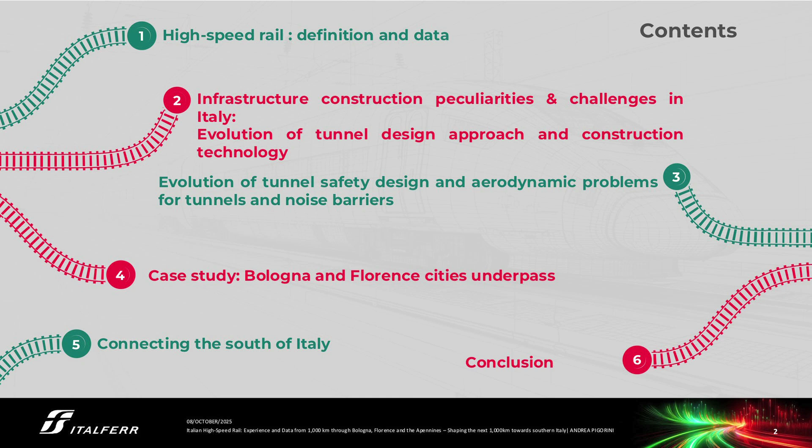But anyway, let's start. This is the contents of today's presentation. I will give you some definitions and data of high-speed rail, and then I will take you through the evolution of tunnel design approach and construction technology, taking into account the peculiarities and challenges of my country, Italy. Then we will go through the evolution of tunnel safety design, with some specific operational safety design, giving some clues about the aerodynamic problems we have seen for tunnels, and for noise barriers. Then we'll go through some case studies, Bologna and Florence city underpass, connecting the south of Italy, what we are actually doing these days, and some conclusions.

I pick up this definition from UIC, Union Internationale des Chemins de fer. Basically, high-speed rail is a whole integrated system, but the two legs of this system are the infrastructure for new lines designed for speeds of more than 250 kilometers per hour, and the rolling stock, especially designed for train sets, telecommunication, signalling, and operating conditions.

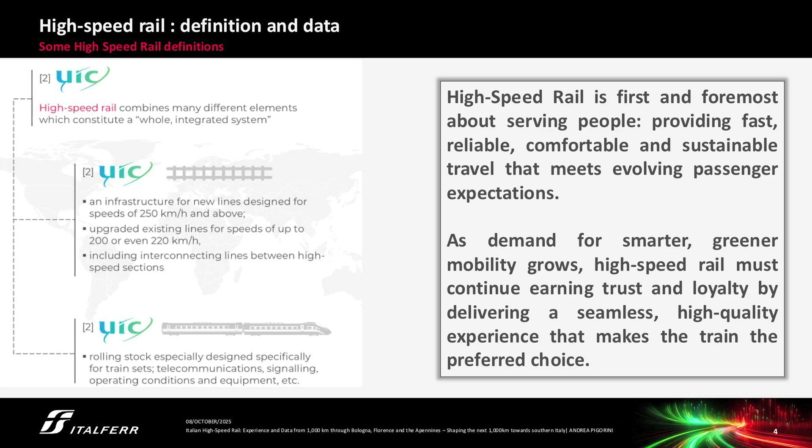But I like better this definition: high-speed rail is first and foremost about serving people, providing fast, reliable, comfortable, and sustainable travel that meets evolving passenger expectations, making the train the preferred choice. I think this is something I'm proud of as a railway engineer, working at Italferr, the engineering company of the Italian State Railway.

Some global data: we have more than 60,000 kilometers around the world of high-speed railway line. Of course, China is taking the most, more than 45,000. And there are about 13,000 kilometers of high-speed railway lines in Europe. There are also quite a good number of new tracks under construction, spread around the world.

And here come the stretches during the time. The first one is the very well-known Shinkansen in Japan, that was 1964. Then Italy came with the first stretch of the Firenze-Roma in 1981. And then other countries around the world followed, also UK, in 2003, with the stretch towards France and the Channel Tunnel.

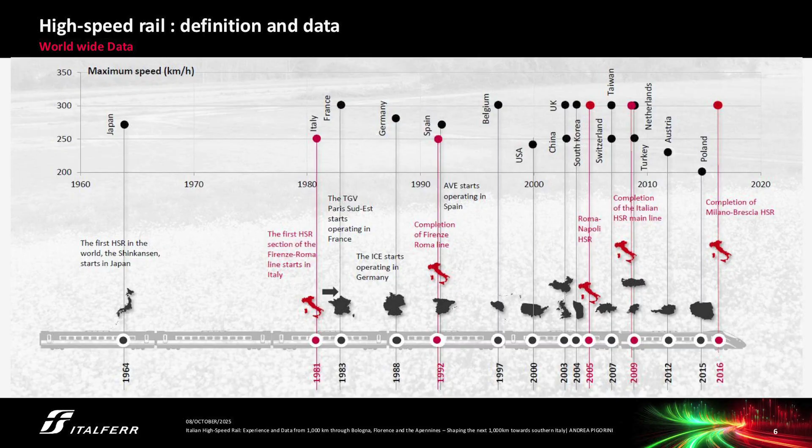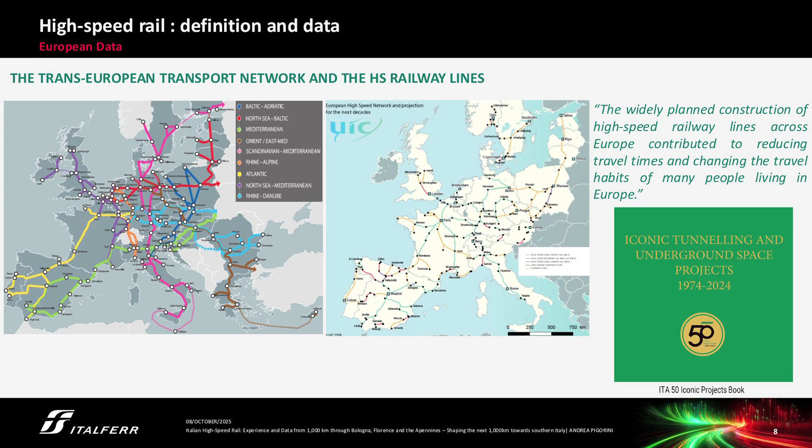Of course, the high-speed railway have been built along the Trans-European Transport Network. Regarding Italy, the two main corridors that cross Italy are the north-south Scandinavian-Mediterranean corridor from Helsinki to La Valletta, and the east-west Mediterranean corridor, the green one, that crosses Italy's northern part across the Po Valley.

And we have recognized the European high-speed network also in the ITA 50 Iconic Project book that was issued last year for the 50th anniversary of the International Tunneling Association, because it's true that railway lines across Europe contribute to reducing travel times and changing the travel habits of many people living in Europe.

Basically by shortening the distance between cities. And here is the stretch in operation in Italy, basically from Turin to Milan, and then going south, Bologna, Florence, Rome, Naples, and Salerno. At the end of 2009, there was a full operating network.

And as I mentioned before, this gives a large reduction in train travel time. As you can see, just on the last line, between Milan and Rome, we went from 4 hours and a half to less than 3 hours.

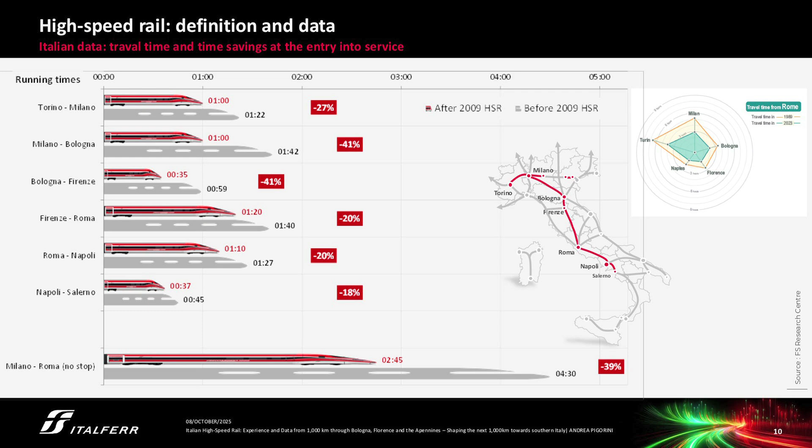Also, again on the Milano-Roma stretch, this changed the habits of the means people were using to go from Rome to Milan. We went from 36% of passengers using train to basically 80%. So just 10% of people are taking plane, and the other 10% private cars.

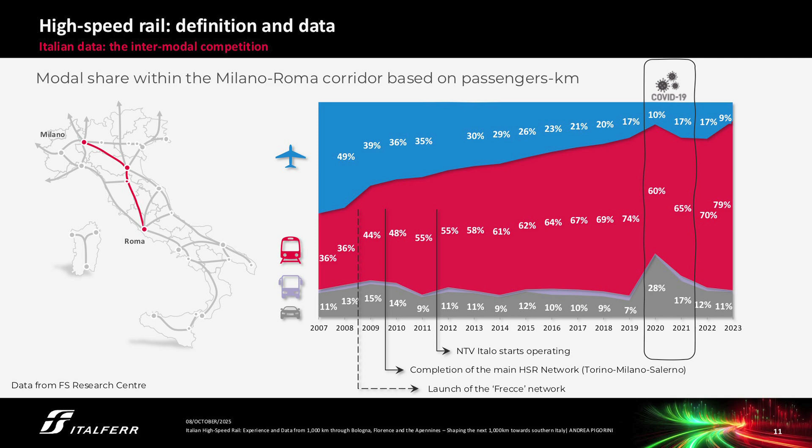I want to give you also some clues about cost. I won't be silent about that. So basically, the total rail infrastructure investment was about 29 billion euros, with design, investment, civil works, track and technology. But if we also include costs for mitigation and compensatory works, this gives an overall cost of 32 billion euros. That is the cost that was spent between 1996 and 2018.

And if you take into consideration the length of the high-speed railway, this gives us a unit cost per kilometer of high-speed railway line of 40 million euros. This cost is quite more, I have to say, than the unit cost for high-speed lines that have been built, for instance, in Spain and France. That is about half of this. But we got some explanation for this.

Because, of course, first of all, there was the choice to build a high-speed and high-capacity railway line, meaning also freight transport, which gives a maximum design gradient of 1.8%. That requires construction of many kilometers of tunnels and bridges, beside the orography of Italy, which is quite challenging. And we have, of course, in Italy, a high level of seismicity, a geological and geomorphological complexity, plus additional mitigation and compensatory works delivered for the surrounding areas.

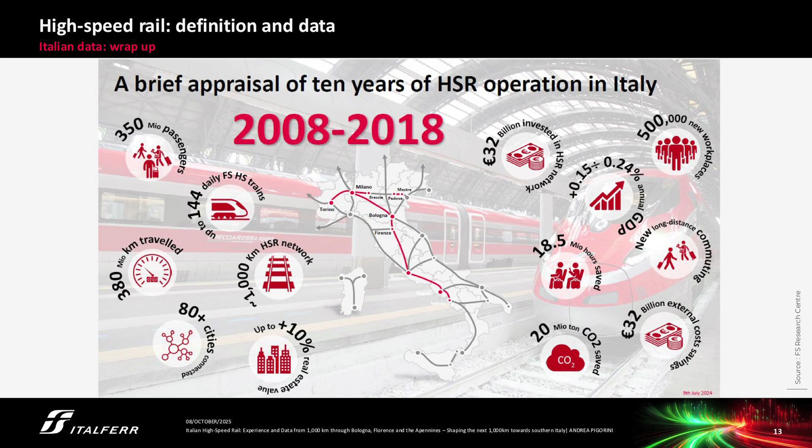And this is just a slide to recap, basically: around 1,000 kilometers of high-speed railway network in operation, 350 million passengers on our trains in these 10 years, and 32 billion euros of investment, as I mentioned before.

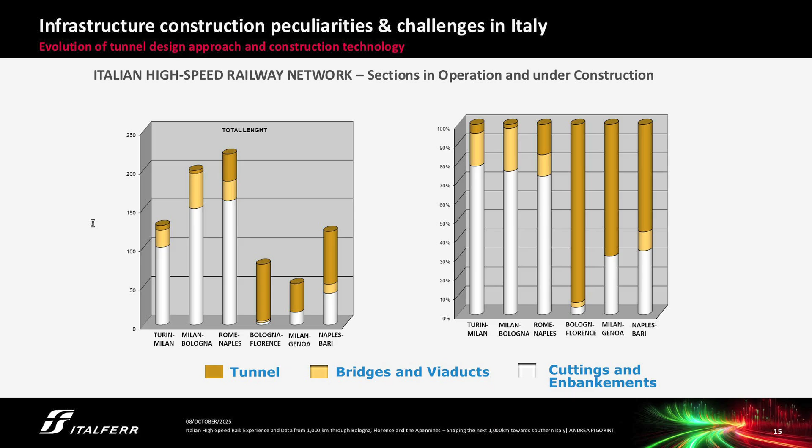So basically, as you can see, the last stretches, Bologna-Florence, Milano-Genoa, and Naples-Bari, have very long stretches underground, with 90% of the Bologna-Florence stretch, but also Milano-Genoa and Naples-Bari are more than 50%. And those are the total figures.

In operation and under construction, we are talking about 1,500 high-speed kilometers of high-speed railway, with 330 kilometers, or more than 20% of tunnels, and also a good number of kilometers of viaduct.

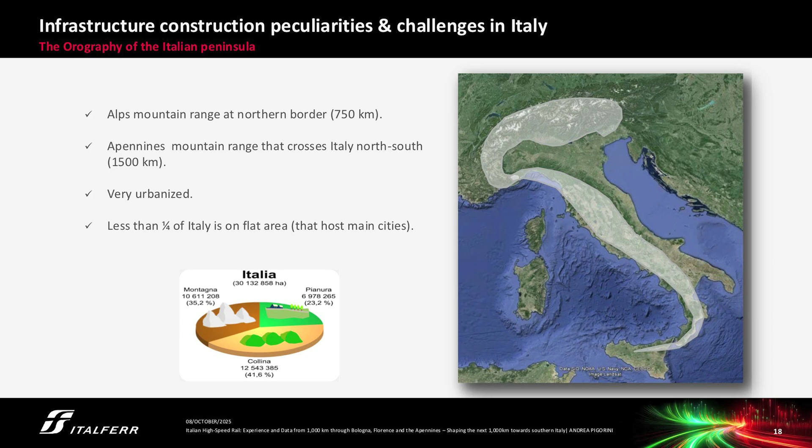Now I want to take you through the evolution of tunnel design approach and construction technology, associated to this country, which is very peculiar as for the orography: the Alps mountain range on the northern border connecting Italy to the rest of Europe, 750 kilometers, and the Apennines mountain range that crosses Italy north-south, 1,500 kilometers. It's a very urbanized country, with less than one-quarter on flat area.

From a geological point of view, we have difficult geological and geomorphological conditions, major fault zones, mainly in the Apennines, formed by structurally complex rock flysch with squeezing and swelling hazard, and rock mass often bearing methane gas with explosion hazard. In the main cities, the subsoil mainly consists of alluvial deposits with the water table close to the surface, high seismic risk in many Italian regions, and landslide hazard on more than 20% of the national territory.

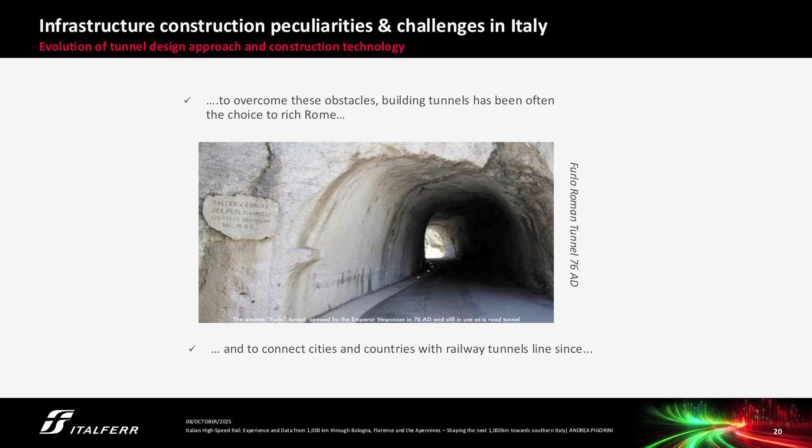To overcome these obstacles, since the time of Vespasian, building tunnels was the correct choice to reach Rome and to connect cities and countries with railway lines.

Starting this journey, I would like to start from 1871, that is the Frejus tunnel. Actually, the Frejus tunnel is the actual railway tunnel still connecting Italy and France by train - it is the only one. We are waiting for the Mont Cenis tunnel, but I guess we will have to wait another 10 years probably.

That was a single bore, double track tunnel, 12 kilometers long, where for the first time a compressed air drilling machine was utilized. That was a kind of ancestor of the modern jumbo.

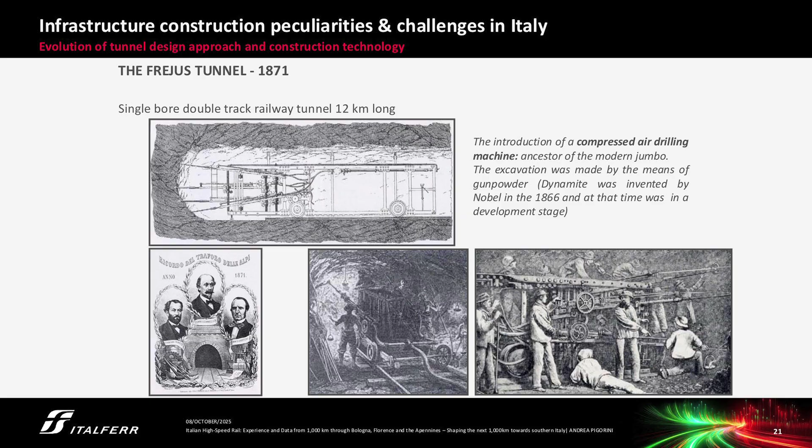Jumping to 1934, the great Apennine tunnel between Bologna and Florence. This was a conventional excavation tunnel with a sequential approach, the so-called sequential excavation method, with a small tunnel section.

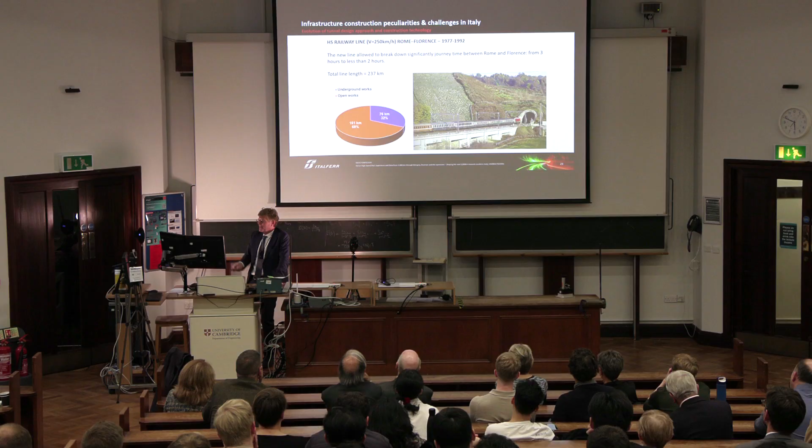Then came the Roma-Florence stretch, the first one, built between 1977 and 1992. The stretch is 240 kilometers, one-third of this underground, and at that time we mainly used the New Austrian Tunneling Method, NATM.

The main principle behind this method was that the rock mass has to be considered as the main component of tunnel support, so the primary support is assigned to enable the rock to support itself. The method also introduced the use of a new technology for that time, the shotcrete rig, which was fully in place.

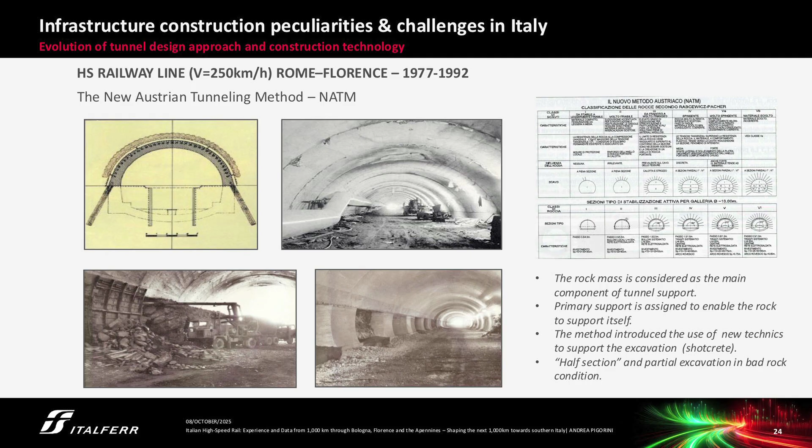As for the rock mass classification, half section and partial excavation were used in bad rock conditions, as you can see in these pictures.

Coming to the Bologna-Florence high-speed line, the new line between Bologna and Florence, 1996-2009, we had this masterpiece recognized in the ITA book project. Basically it's a kind of base tunnel - not one tunnel actually, there are 9 tunnels with a total length of 73 kilometers. It's double track, 9 double track tunnels, with up to 600 meters of overburden in extreme severe rock.

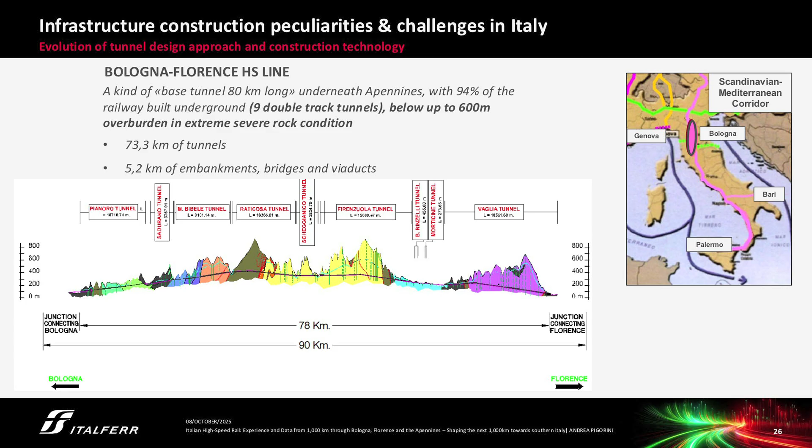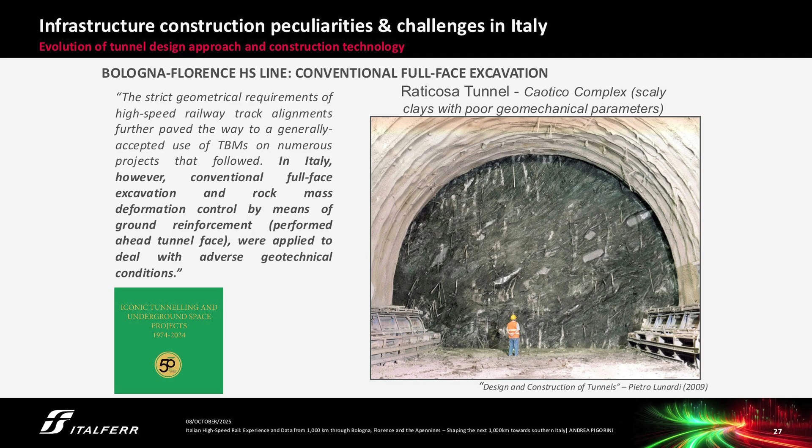That tunnel was excavated with conventional full face excavation, and rock mass deformation was controlled by means of ground reinforcement performed ahead of the tunnel face, applied to deal with adverse geotechnical conditions. As you can see from the picture here, this is the tunnel face of the Caotico Complex, where you can see scaly clay with poor geomechanical parameters, with boulders included in that face.

The new Bologna-Florence stretch was designed and built according to the ADECO-RS method, analysis of controlled deformation in rock and soils. The main principle behind this approach is, besides the clear separation between design and construction which is a must, the full section excavation even in bad ground conditions.

The tunnel studies the 3D problems with the necessity to understand the behavior of the tunnel core face, and the tunnel core face is used as an instrument to control deformation and the stability of the tunnel. So you have to prevent deformation occurring ahead of the tunnel face, to prevent the deformation acting also on the preliminary lining that will be installed later on.

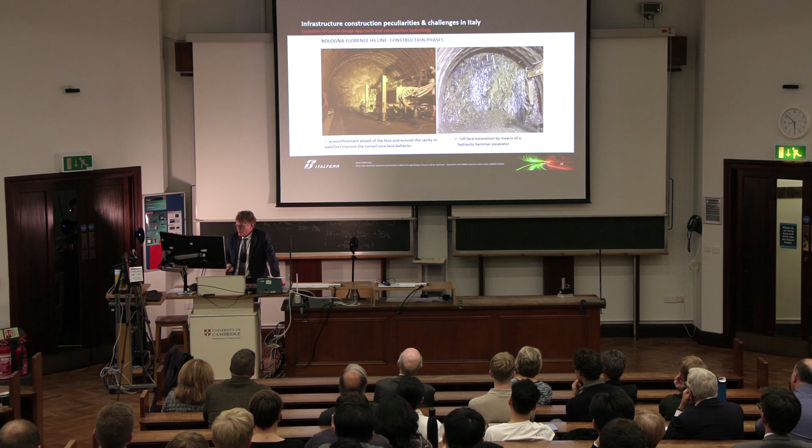And these are some pictures of the construction phases. Usually we have a pre-confinement, let's say ground improvement ahead of the face and around the cavity, to improve the tunnel core face behavior to control the deformation.

Full face excavation usually done by hydraulic hammer. Invert, shotcrete, ribs, and sometimes also invert preliminary lining with ribs and shotcrete to prevent tunnel face and invert arch deformation, especially in bad behaviors, let's say.

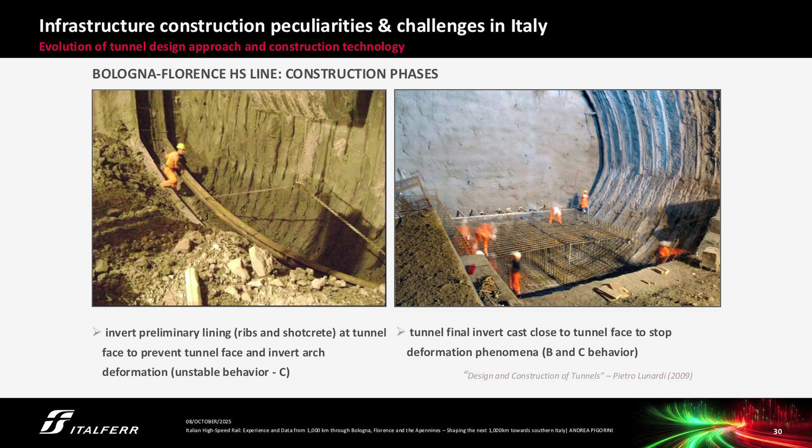Sometimes you have to cast the final lining at the invert close to the tunnel face to close your structural section at the tunnel face. Then, as usual, waterproof membrane and crown and side walls concrete final lining installed at a certain distance from the face. So basically, let's say at 150 meters from your tunnel face, you could get the final structural component of the tunnel all in place. So your tunnel is finished, is completed, and from the structural point of view everything has been done, let's say.

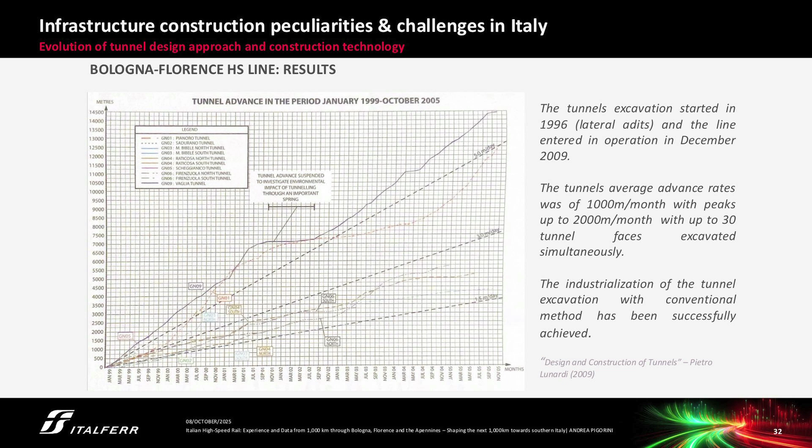And with this method, the Bologna Firenze was excavated with a good production rate, from 1.5 up to 5 meters per day. And actually that tunnel, which was also quite long, 19 kilometers, was not excavated only from the adits, but they have 15 lateral adits also, and that gives an average advance rate of 1,000 to 2,000 meters per month, excavating up to 30 tunnel faces at the same time.

And to complete this time lapse, I want to talk a little about Naples Bari, that is a stretch under construction now. Well, it's very challenging. We are crossing again the Apennines, and the tunnels of the existing historical line are quite famous in Italy.

And this stretch is, we are in marine deposit, pelitic and calcareous rock, turbiditic formation, that is an alternation of sandstones and calcareous rock with clay and clay shales. And we have also very important thrust faults.

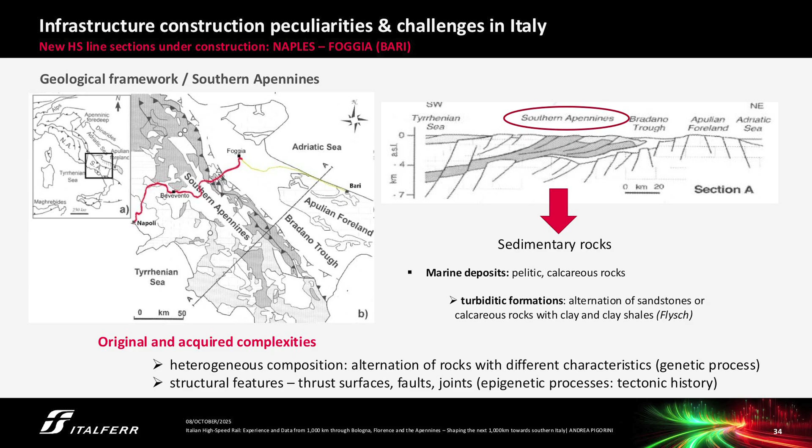And so basically this material has a heterogeneous composition, because there is an alternation of rock with different characteristics, as I mentioned, and structural features because of the tectonic history of the region, so thrust surfaces, faults, and joints.

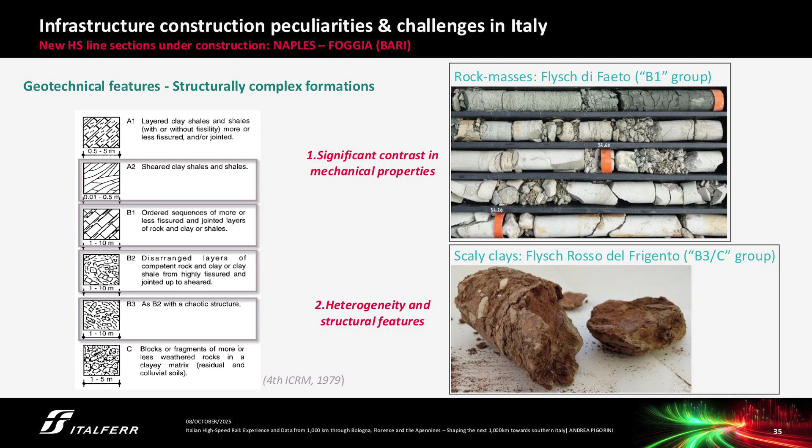And you can see also from this picture from the bore log, significant contrast in mechanical properties in the Flysch of Faeto, and heterogeneity and structural features in the scaly clays of the Flysch Rosso.

And these scaly clays basically are formed by this platy-like shape called scales, and the fissures are frequently smooth and often also slick inside as a consequence of the shearing condition.

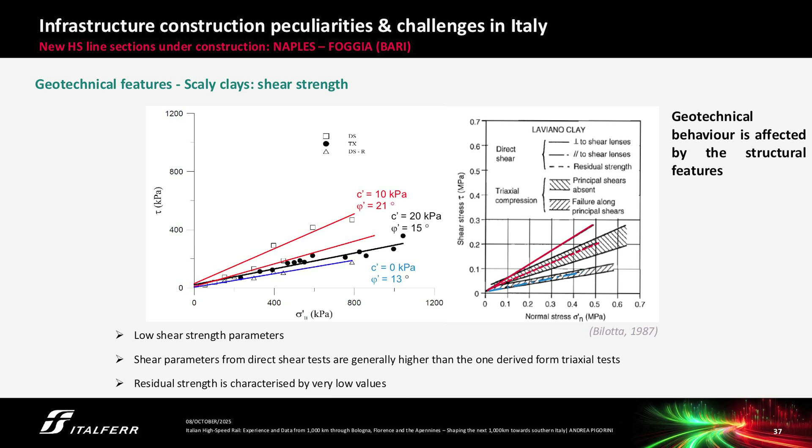And you can see this also from some laboratory tests, triaxial shear strength tests. And what I would highlight is that especially for residual condition here, the cohesion goes to 0 and the friction angle is very, very low. So here also you have to prevent deformation from occurring. You have to try to prevent reaching the residual value of the strength parameters.

So this is the context, and in this context we have thought that going deeply underground has been considered the most effective solution to mitigate the landslide risk, underpassing the critical areas of unstable slopes.

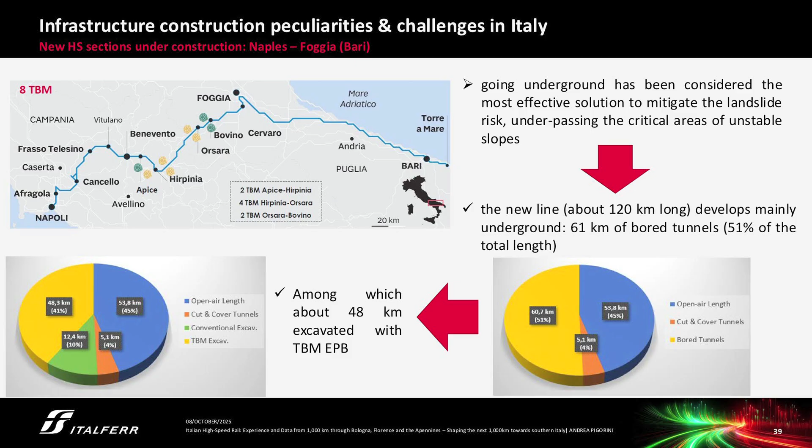So the new line, 120 kilometers, was built mainly underground, more than 50% of the stretch. Among this 50%, that was about 61 kilometers, 48 kilometers were excavated by TBM, and 8 of them, as you can see here. There are quite 4 in operation, and the others are coming.

Which is the advantage of using EPB TBMs? Of course, you can reduce ground deformation because you can control the deformation at the face by means of the earth pressure balance machine. With the shield and precast segments, you can guarantee to control the deformation and tunnel stability very close to the tunnel face, because the shield is there and the concrete lining will be put in place 10 meters behind the tunnel face. You can also minimize ground disturbance and the tunnel boundary.

On the other hand, you have to take into account squeezing ground conditions and study the shield length, which probably must be a short one. To minimize potential blockage in squeezing ground, you have to taper it to accommodate some deformation in this case. High thrust force also has to be installed in case of blockage.

From a construction process perspective, the quality of precast segmental lining is well known and it's better than cast-in-situ concrete. The automatic control of TBM operation allows you to control your parameters in real time and check that everything is going as foreseen, as per the design requirements. Of course, construction time reduction is also a plus.

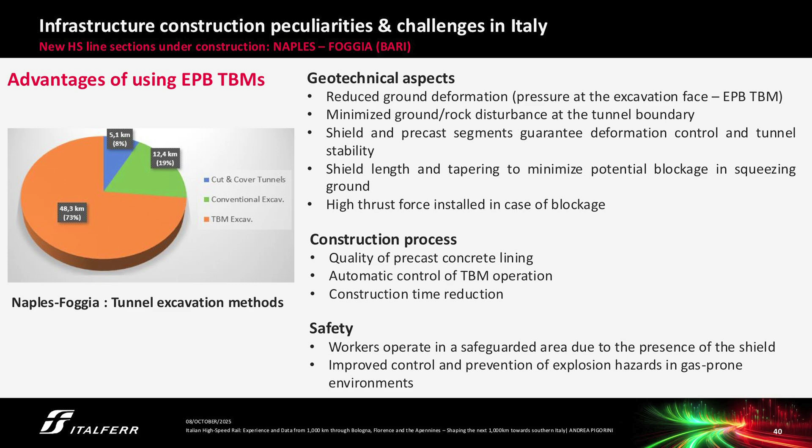From a safety point of view, workers operate in a safeguarded area due to the presence of the shield. Also, in explosion hazard, gas-prone environments, it's a plus, because you can control gas intrusion with the EPB machine, since you have earth pressure at the face of the tunnel that can prevent methane gas from rushing into the tunnel.

Now I want to talk a bit about tunnel safety design, operation safety design, and some aerodynamic problems that we have studied.

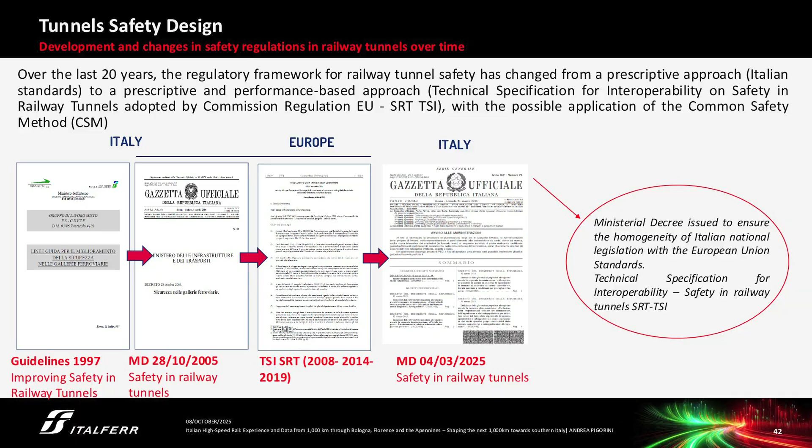The safety regulations have of course changed over the years. Since '97 there have been quite a few changes, but I want to mention the Technical Specification for Interoperability, TSI, which is the European standard, namely safety in railway tunnels, a specific code that deals with safety in railway tunnels. This has also been adopted by the Italian code recently.

Due to these codes, and also due to the increasing train gauge and increasing train speed, we went from a radius of double track tunnel of 4.4 meters up to 6 meters, because, for instance, we had to increase the sidewalk from 0.5 meter to 1.2 meters, among other issues with safety equipment.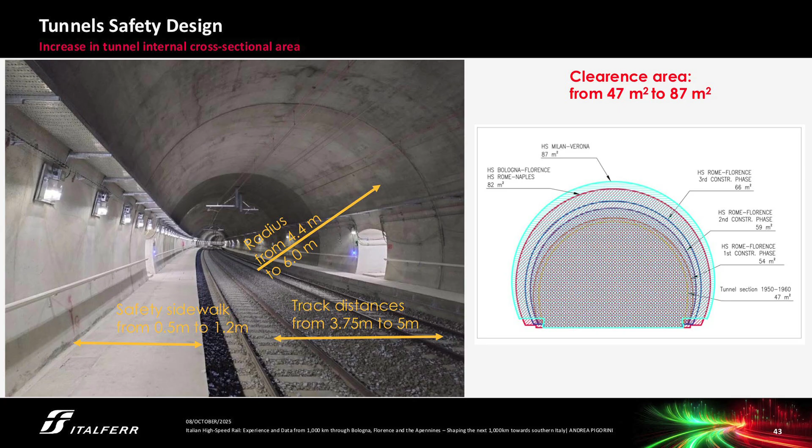This gave us an increase of clearance area from 47 square meters up to 87 square meters. If you look at this section over time, we went from this one in 1950-1960, which was 47 square meters, up to this one with a clearance area of 87 square meters, the one currently in use. Below you can see not only the internal section but also the excavation section.

To have 87 square meters of clearance area in the tunnel, you probably have to excavate something like 150 to 156 square meters. That gives a ratio between the two areas of 1.8. That's a lot of mass to manage, of course, but it is due also to this effect here: the already existing high-speed trains in tunnels.

The passage of high-speed trains through tunnels generates atmospheric pressure disturbances that propagate along the tunnel at the speed of sound and remain inside it because they are reflected from the other adit, coming back, and these oscillations continue until they dissipate due to friction on the surface of the lining. Rapid pressure variation may cause damage, or at least discomfort, to the passengers.

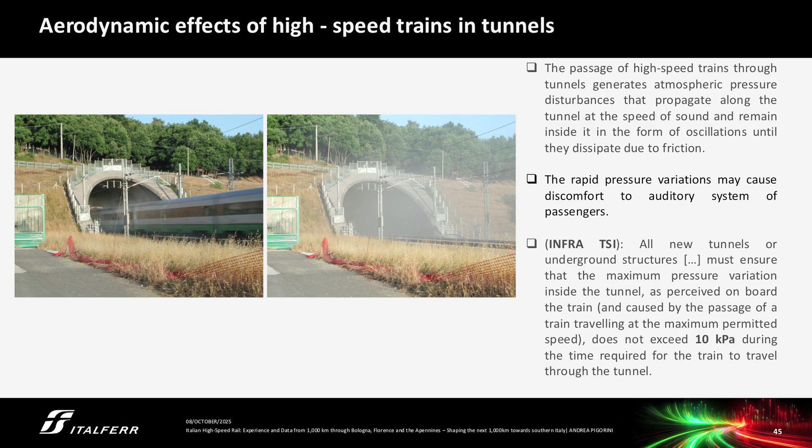The TSI states that you have to control this overpressure, and it must not exceed 10 kilopascals during the time required for the train to travel through the tunnel.

Let me walk you through these graphs. Here you have the timeline, here is the tunnel length from one adit to the other, and here you have the pressure, again against time. At T0 the train is entering the tunnel with its nose here, moving at the speed of the train, but at the same moment a positive pressure wave induced by the train nose is measured at a section. Take this line as the reference line where the instrument measures.

At T1 is the time that the wave of pressure reaches the mid of the tunnel and gives this overpressure. Then comes the entry into the tunnel. The tail is also entering. So this is the nose, and this is the tail of the train, also going with this speed.

At T3, the wave generated by the train tail reaches the measuring point, and this is negative, so this gives you a drop down of the pressure.

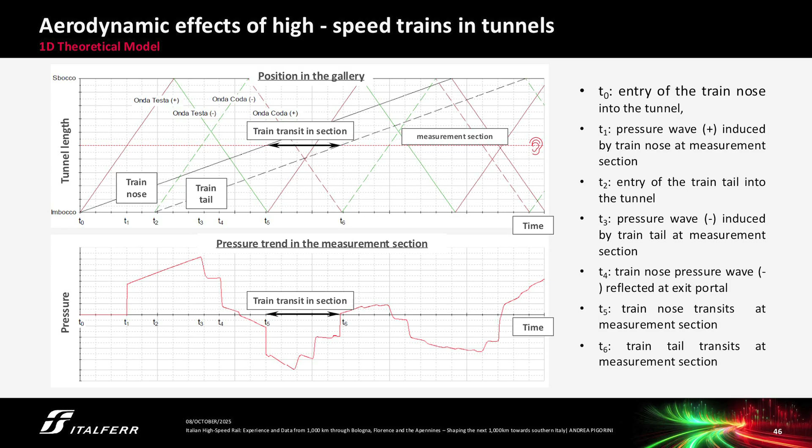Actually, for a double track tunnel you may have, and you have to study this too, but it's more complicated so I won't show you, the crossing of the two trains. You should add this to the overpressure generated by the train going in the other direction. But what we did was a trial site in the Roma-Napoli stretch, in 2009.

So what we did was put some instruments in 3 sections. We measured pressure, temperature, air density, and velocity.

So the pressure, the changing movement of the wave of pressure, is a 1D phenomenon. So it can be well represented by a 1D software.

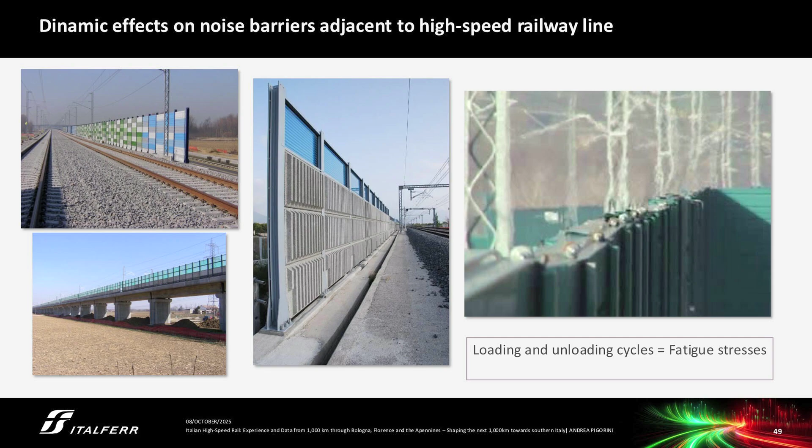So what we did in this case was, again, a field test, in order to evaluate the action to be considered in the structural analysis, to design and check the life of this noise barrier.

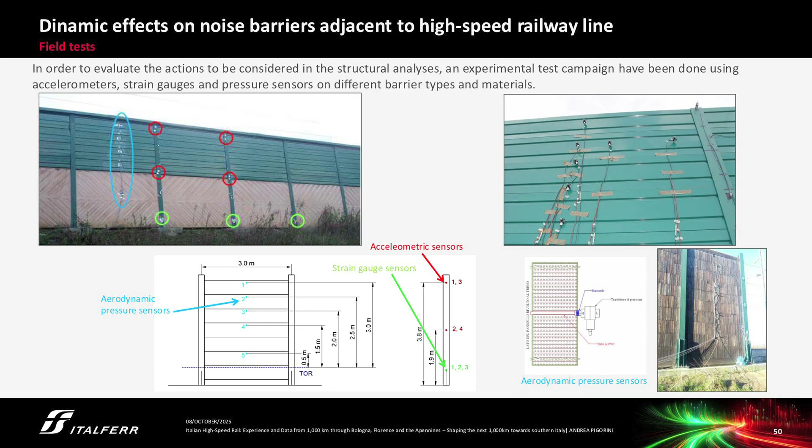We installed aerodynamic pressure sensors along the panel of the barrier. They were installed on the other side of the barrier, but then connected with a PVC pipe to the internal side of the barrier. We also installed accelerometers on the posts of the barrier, and strain gauges at the bottom of the posts.

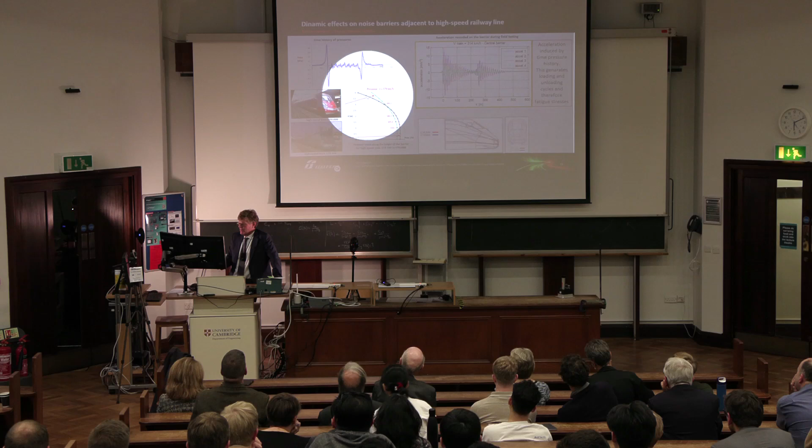This is a general point, but if you look at these graphs, you get a different pressure according to the height of the barrier and the type of train. For instance, the ETR 1000, which is a bit bigger than other trains, gives a higher pressure in this part than this other train. But on the other hand, because its aerodynamics are better, the pressure here is a little bit smaller.

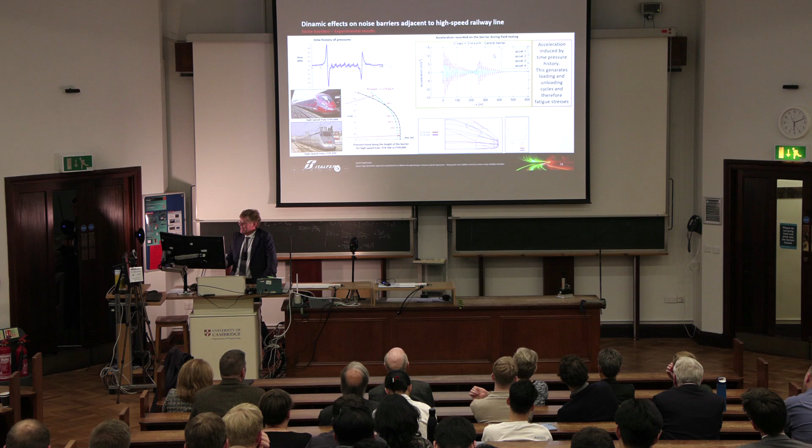We have also measured the acceleration induced by the time pressure I've shown you. This generates loading and unloading cycles and therefore fatigue stresses.

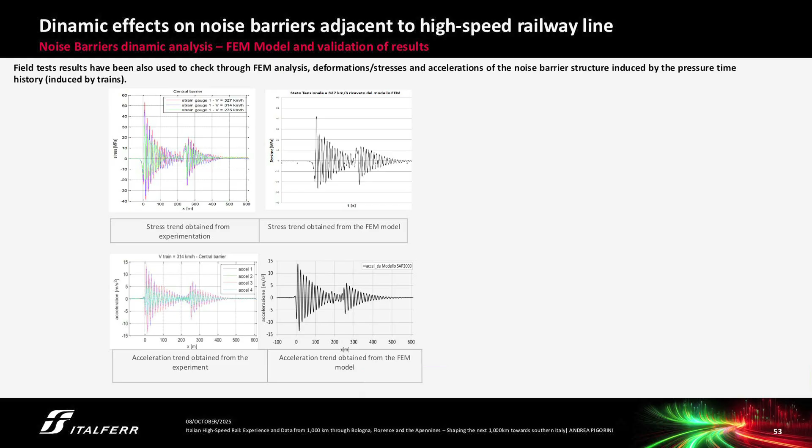We were able to match and fit the relative pressure versus time experimental data to the CFD analysis. Then, having done this, we could use this data in a FEM structural model, matching the accelerometers measured in the field test with the FEM model, and the fit was quite good.

This is for the strain gauge, and the accelerometer data is below. This is the data of the strain gauge coupled between the theoretical value and the measured value.

So with this, basically, we didn't have to do any more tests, because now we're able, through a field test result checked with CFD analysis and then FEM analysis, to calculate the fatigue damage of the barrier and understand the residual life of the structure over time. This is used for the design of new barriers.

Now, coming back to tunnels, I want to talk a little bit about the Bologna-Florence cities underpass. I have to mention that some of this experience I'm going to talk about was done with GCG and with Robert Mair, so it's a pleasure to me to share this experience with you.

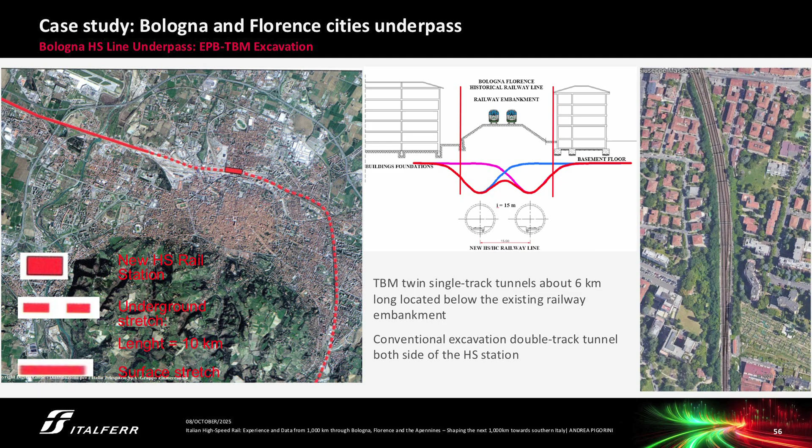The Bologna underpass is a 10-kilometer underground stretch. Again, the choice was to underpass the city of Bologna with tunnels 10 kilometers long, shown here as dotted lines. The choice was to have a TBM, twin single-track tunnels, just below the existing railway embankment, to avoid going underneath buildings.

We also had to have some conventional excavation, because before entering the new underground high-speed station, this rectangular box here, we have to bring the two tracks close together at 4 to 4.5 meters, so you need a double-track conventional tunnel, not a single-track TBM tunnel.

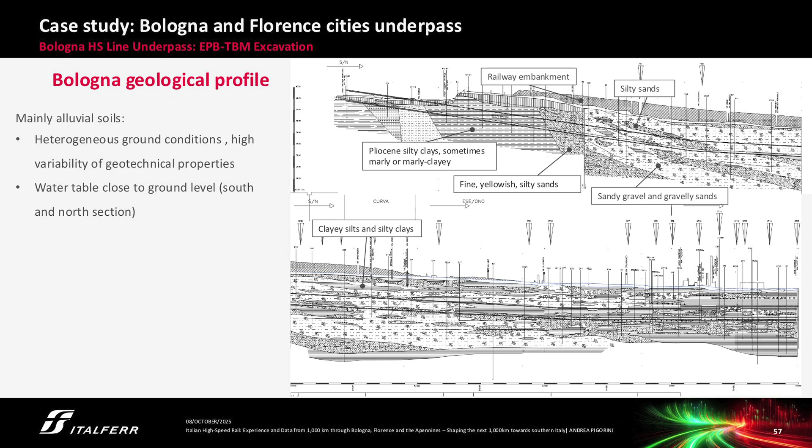From a geological point of view, in Bologna we have mainly alluvial soils, heterogeneous ground conditions with high variability of geotechnical properties, as usual for this material. The water table was quite close to the surface at the south and north sections, and likely below the invert of the tunnel in the middle.

The design choice, as I mentioned for Bologna but it's the same for Florence, is to have two single-track tunnels, using an EPB machine, because the ground was good for this kind of machine, protective measures for existing structures where needed - I'll go through that in a while - and of course a deep monitoring program to control predicted design values and TBM operating parameters.

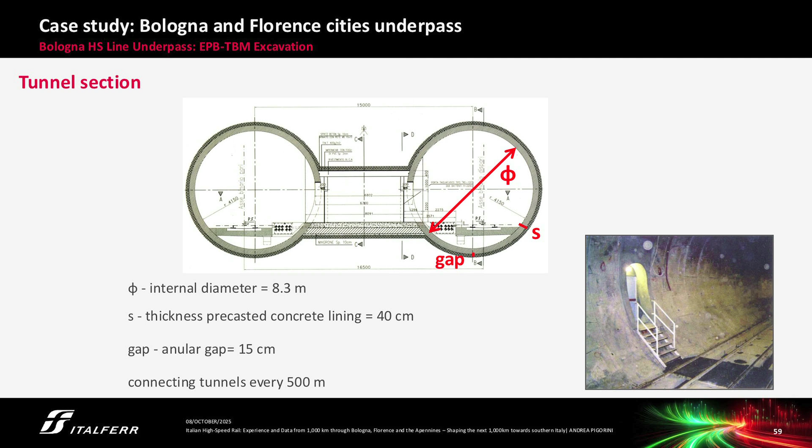This is the tunnel section: internal diameter 8.3 meters, thickness of precast concrete lining 40 centimeters, annular gap between the extrados of the lining and the excavation surface 15 centimeters, and a connecting tunnel every 500 meters.

And this is an EPB machine. It's not, I'm kidding, don't worry. But I wanted to show you this - this is Mr. Lovat, Richard Lovat. He's more than 92 years old and still in good shape.

And on the right we got the EPB machine, the Lovat EPB machine, the two Lovat EPB machines that excavated in Bologna, 9.4 cut diameter and the length of 10 meters. And this is the launching shaft of the two TBMs.

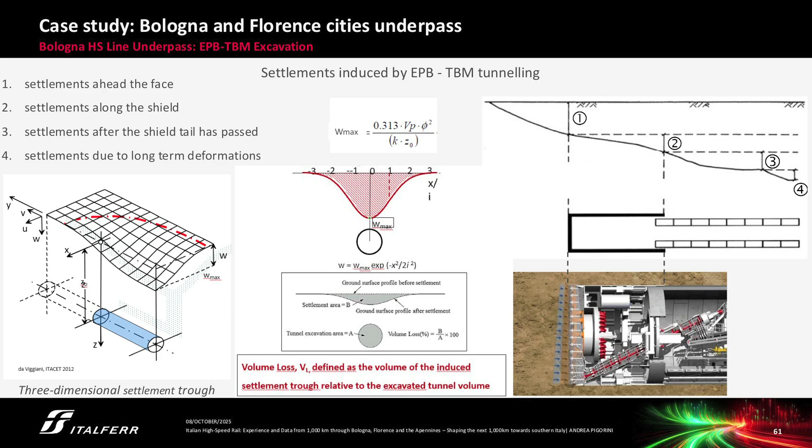Coming to the protective measure, we know that the transversal settlement induced by tunnel excavation is well represented by the normal probability distribution, the Gaussian curve, as confirmed by field measurements. The curve is characterized by the maximum settlement value W max, and by the I value, the inflection point, that is related to K, a factor correlated with the type of ground, and with Z, the depth of the tunnel, the distance of the tunnel center line to the surface. We know that W max is correlated to VP, or VL, volume loss.

Volume loss is the area of the Gaussian trough, correlated with the area of the tunnel excavation. And of course W max is also a function of the diameter of the tunnel, of K, and again of the depth of the tunnel.

So we have this transversal curve, and we also have an S curve, a longitudinal curve, so that the settlement curve also extends ahead of the tunnel face. Actually, when excavating with an EPB machine, you usually have settlement ahead of the face, settlement along the shield, settlement after the shield tail has passed, and eventually settlement due to long-term deformation.

With this volume loss, the prediction of ground settlement has been done. Usually what is done is to vary the volume loss, and for Bologna it was 0.41% up to 1.5%. The K parameter also varies depending on the type of ground, and for Bologna it was 0.35 and 0.5. Then you can check with this Gaussian curve your buildings' damage.

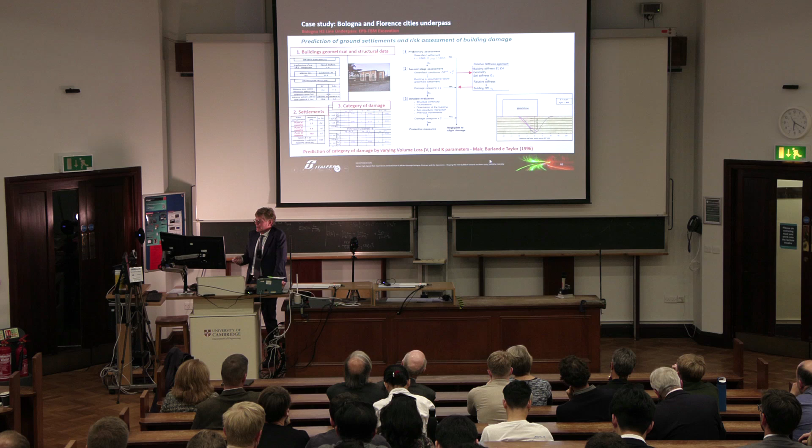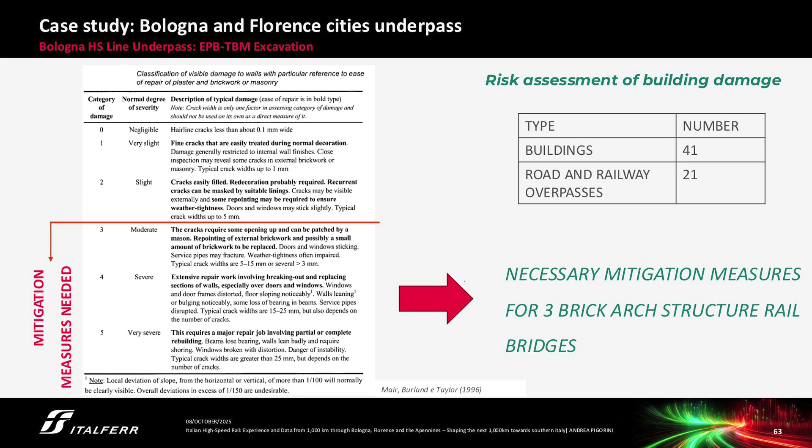If you reach a damage category according to Mair, Burland, and Taylor evaluation of damage more than 2, then from category 3 ahead, you have to design mitigation measures. For Bologna, we didn't need it for buildings, but we needed it for underpassing 3 brick arch structure rail bridges. I want to talk briefly about this building, the Via Emilia Railway Viaduct.

The distance between the tunnel crown and the foundation of the viaduct was just 10 meters. Luckily, as I mentioned before, the groundwater was below the tunnel invert, and the ground was mainly alluvial, mostly gravel and sandy gravel above the tunnel crown, with some silty and clay layers also present.

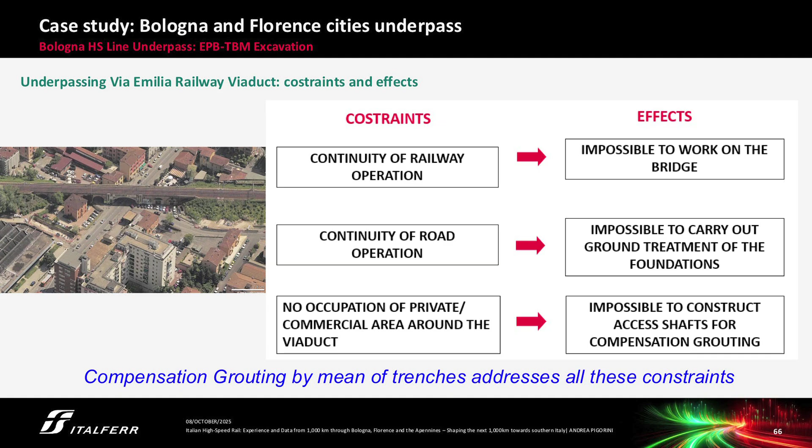So we had some constraints: we needed to guarantee the continuity of the railway lines, so it was impossible to work on the bridge. We had to guarantee continuity of road operations, so it was impossible to have ground treatment below the foundation of the bridge. And we couldn't use private area around the viaduct, so it was impossible to build a shaft to eventually go for compensation grouting.

But what we did was again compensation grouting, but from trenches. Actually, it was, I guess, the first time that a banana-shaped drilling operation was performed - I'll skip this for now but come back to it.

What we did was define acceptable limits of distortion for the viaduct through a complex structural analysis of the brick structure. This analysis demonstrated that the viaduct could be brought to structural distress both by differential settlement across an individual arch or by relatively small rotation of any individual pier.

Thus, an interactive domain like the one shown here was defined in the deformation space, delineating safe combinations of pier rotation and arch differential settlement.

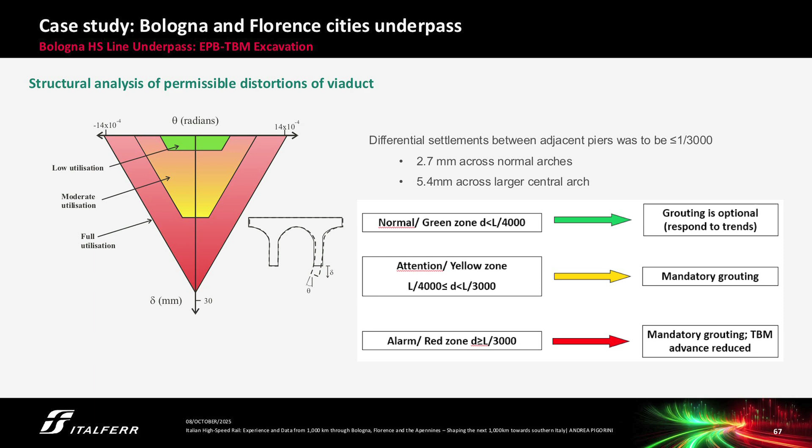Control of rotation of the piers by compensation grouting was considered potentially difficult, since most of the piers have a very narrow footprint. Consequently, a much stricter emphasis was placed on control of differential settlements, ensuring that the maximum possible range for pier rotation was available for compensation grouting control.

So basically we concentrated on this differential settlement, one trigger at 1/4000 and the red one, mandatory grouting, at 1/3000. That means very little differential settlement for a span of 8 meters and a span of 16 meters. So very, very little differential settlement.

As we know, compensation grouting consists of timely injection of grout between the tunnel and the structure to be protected. Tunnel-induced settlement has to be compensated not at the surface, but in the space between the crown and the foundation, by installing pre-installed grout pipes called tubes a manchette. Injected grout induces heave, which reverses the tunnel-induced subsidence, so the structure to be protected experiences only a small and acceptable level of settlement and/or distortion.

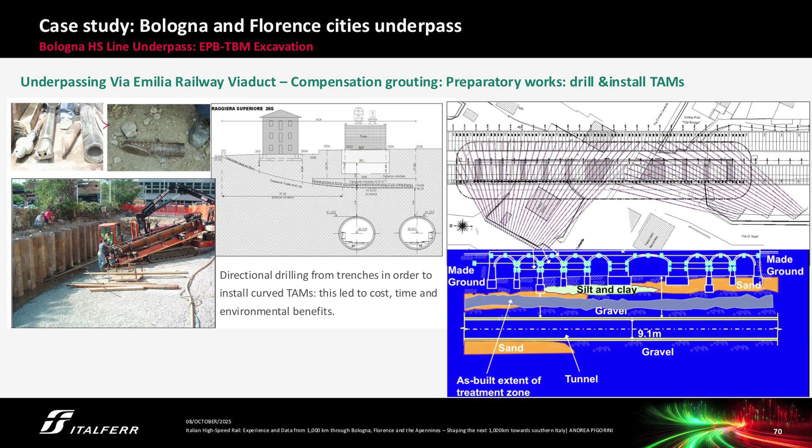This is the site, as I mentioned before. To dig this kind of boreholes you have to use this asymmetric utensil. We used directional drilling, with casing of 114 millimeter diameter and grouting ports every 15 centimeters installed. The maximum drilling length was 68 meters, and the radius of this banana-shaped tubes a manchette rig was eventually 90 meters.

And these are the results we successfully achieved. We measured the settlement with water level gauges at different sides of the bridge. In the end we had very little settlement, and especially very little differential settlement. Here also plotted is the volume loss 0.2% longitudinal curve, and as you can see, with very little volume loss, the grade of the longitudinal curve would be higher than the trigger level of 1/3000.

I didn't mention this fact before, but I will now. We had to inject, to prepare the ground I showed you before, 712 cubic meters of preparatory works, because you had to condition this kind of soil so that it's ready to react to the secondary injection performed while the TBM is passing. This was done in advance, and it was basically 7% of the total injected volume.

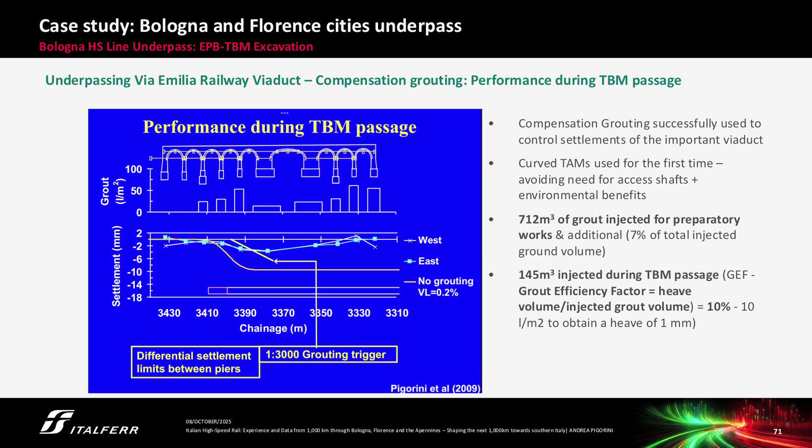During the TBM crossing we injected 145 cubic meters. That gives a GEF, a grout efficiency factor, which is the heave volume divided by the injected grout volume, of 10%. That means you need 10 liters per square meter of surface to obtain a heave of 1 millimeter. So that's our good behavior and results.

And so the two tunnels were completed, that was in 2006, with a good average production of 10 meters per day, and a maximum production of 36 meters per day.

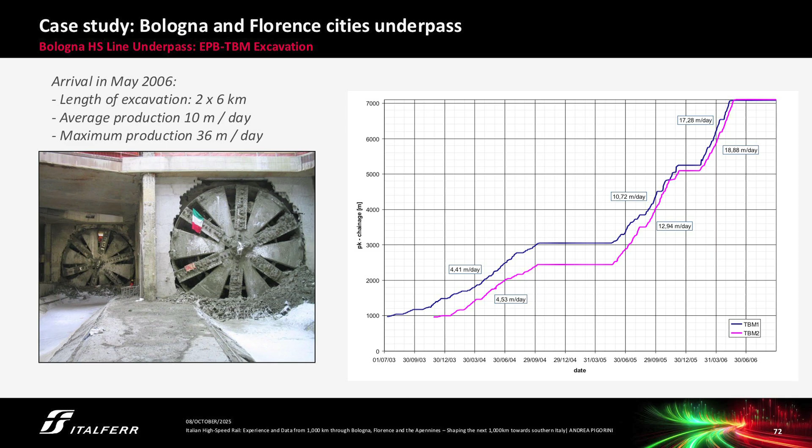I would like to talk to you now about the conventional tunnel. As mentioned before, in Bologna we had also some stretch excavated with conventional method. This is the place where the high-speed railway station has been built, the stretch between the TBM tunnel, about 100 meters long, a little bit more. Between the twin tunnel section and the underground high-speed railway station, a 12 meter diameter double track tunnel was constructed beneath these two buildings you can see.

So using the conventional method, extensive protective measures were put in place, consisting of both vertical and horizontal jet grouting. Of course vertical jet grouting was possible only where the buildings were not, so we had to excavate the tunnel just below these two buildings by stage with horizontal ground improvement.

The tunnel axis is located at a minimum depth of cover of about 17 meters, this being the maximum depth, but usually 17. The subsoil is constituted by fluvial deposits, mainly silty clays and clay silts here, T1 here, but also lines of sandy silt and silty sand were in place. Both formations, anyway, are characterized by very low permeability of 10^-8 meters per second.

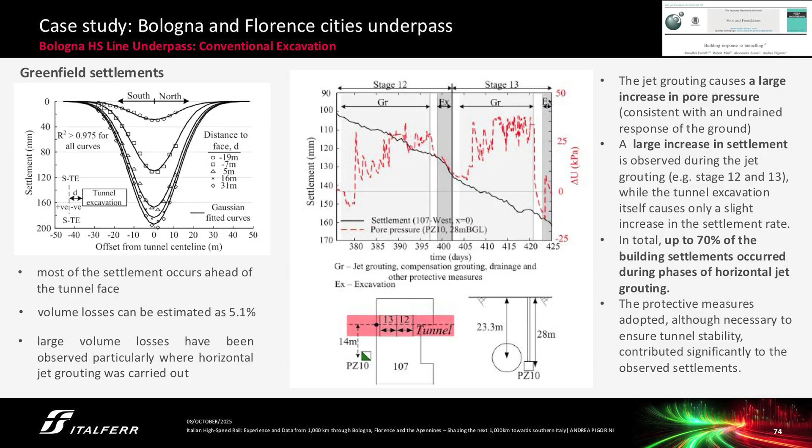So this probably induced this kind of settlement. This is something you have to cope with if you are designing a grouting treatment on tunnels in this kind of soil, not sandy or gravel material. You have to take into account that this could happen because, of course, the protective measure was needed to prevent stability problems, but actually gave a large amount of settlement induced by this increase in water pressure induced by the grouting, which as we know goes up to 500 bars of pressure.

And so it could increase the water pressure also.

From the building side, what we've seen is that building 107, the highest and most rigid one, responded rigidly and simply tilted. So the majority of damage could be attributed to horizontal distortion, but it was actually quite slight to very slight. On the other hand, building 106 had a large settlement distortion resulting in jamming of doors and windows, and cracking particularly in the hogging section of the trough curve, with a moderate level of damage.

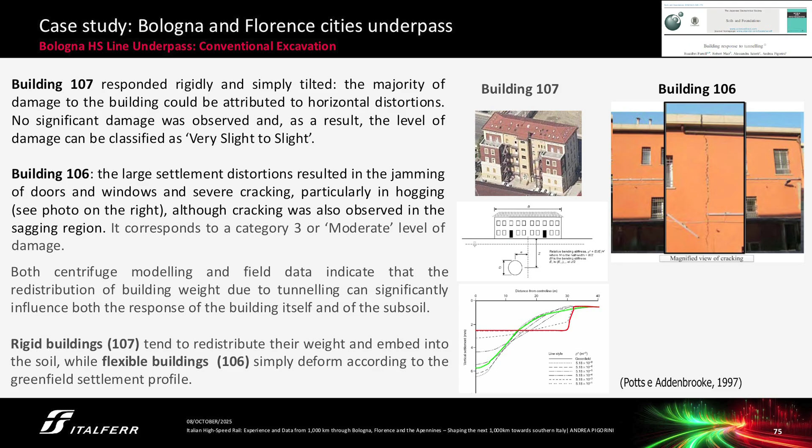Both centrifuge modeling and field data indicate that the redistribution of building weight due to tunneling can significantly influence both the response of the building itself and of the soil. Rigid buildings tend to redistribute their weight and embed into the soil, as we have seen here in Bologna, while flexible buildings simply deform according to the greenfield settlement profile.

I want to shortly talk about Florence, which is very similar to Bologna, because again we have about a 5 kilometer length tunnel below the city with a high-speed station designed by Sir Norman Foster. So Foster designed this station, and it's now under construction.

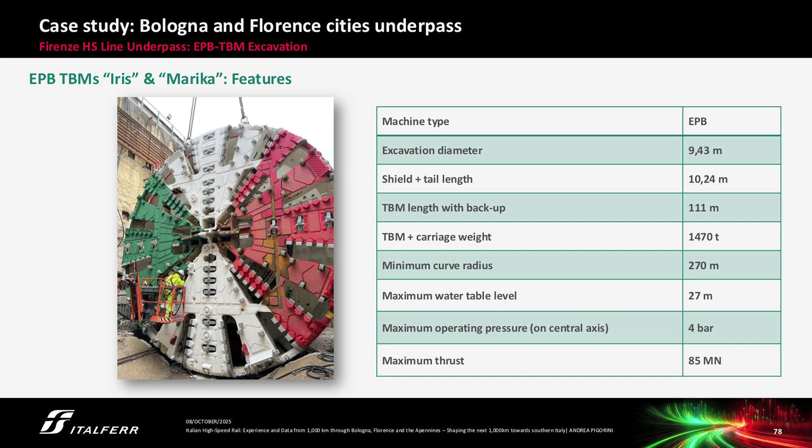So again, 2 EPB machines, they just started here and are, let's say, 1/3 of the way through the stretch, the 2 TBMs. These are some data of the TBM, but basically it's very typical data of an EPB machine, and the diameter, the geometry of the tunnel line is just the same as in Bologna. This is the thickness and the geometrical requirement.

And from a geological point of view, again we are in alluvial soil, as I mentioned. Basically, in the first stretch it was more silty clays, and now here in this stretch it's more sandy gravel soil.

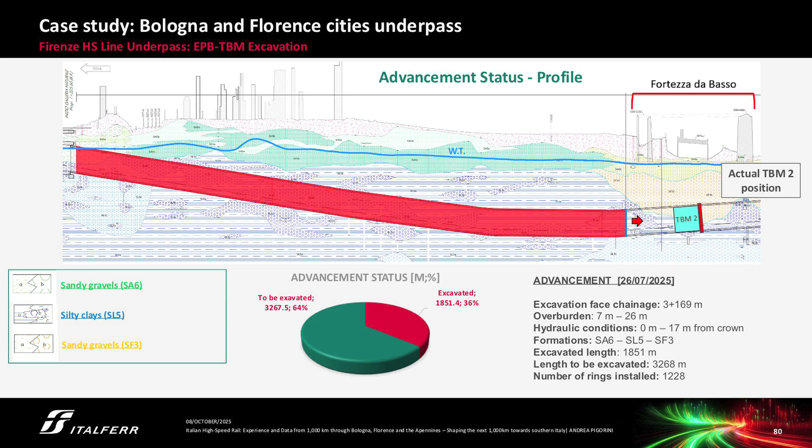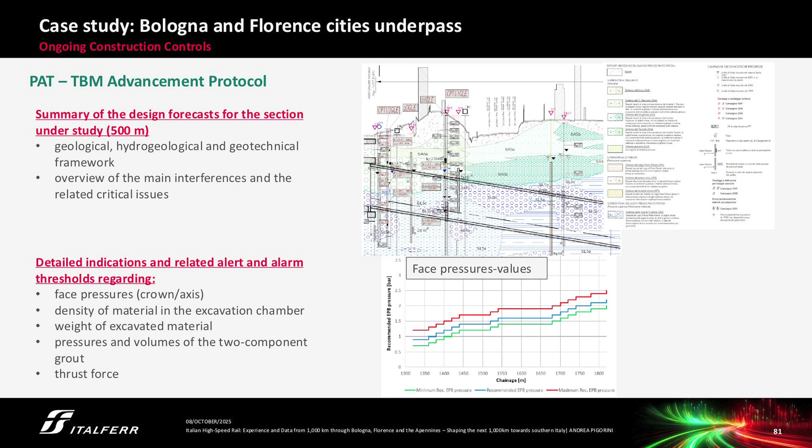And we are working with these ongoing construction controls. I want to show some data about this. Basically, we are doing a summary of design forecasts every 500 meters, putting together all the geological and geotechnical information beside the main interference information, and giving the contractor all the main TBM parameters and the related alert and alarm thresholds, like face pressure, density of the material in the excavation chamber, weight of the excavated material, pressure and volumes of the two-component grout, the backfilling, and thrust force.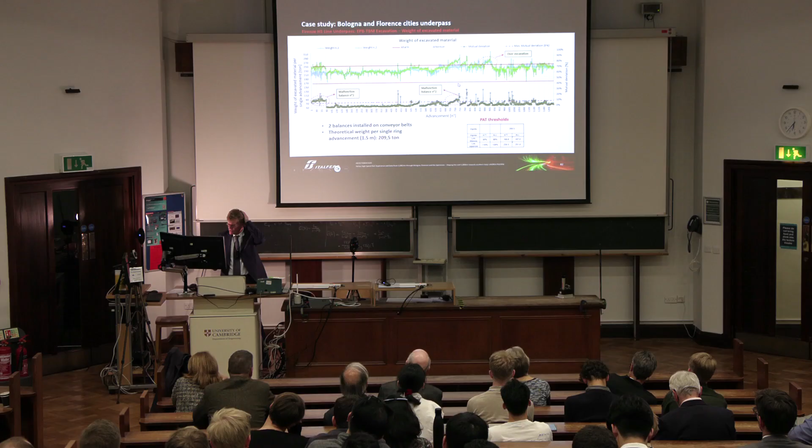Eventually here you have both balances that go above the alarm trigger value, and so that was a real over-excavation, but actually we didn't experience any kind of settlements, though we had to inject more backfilling grouting at that stage. Backfilling grouting in a TBM machine is very important to do together with excavation.

So while you're excavating, you have to backfill your precast lining. This has been done immediately in the shield, basically the tubes are installed in the tail shield, from 6 different points, and this has a theoretical value of 7.2 cubic meters per advancement.

I have to check that this volume is really installed, and sometimes we went above, but this was a problem of injection line washing, so nothing to do with a real problem. But actually sometimes we also experienced damage to the tail seal brush.

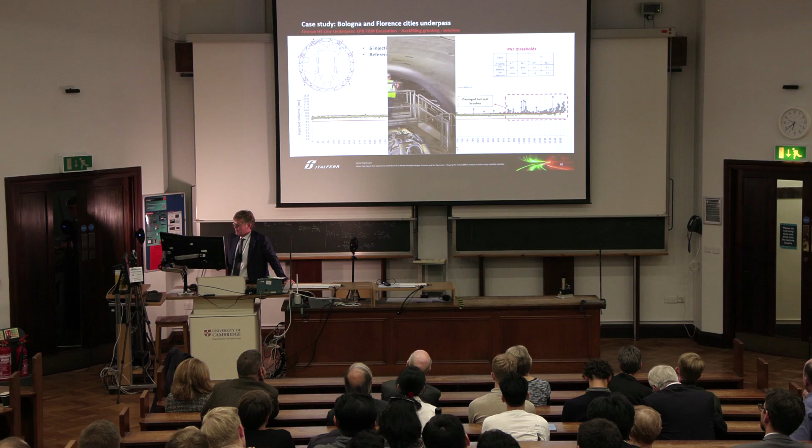You know that in the tail shield there are the internal brushes, and as you can probably see in this movie here, this was a bicomponent coming out between the shield and the concrete lining because the brushes weren't working properly, so they had to be changed, and then the works could proceed.

And this is the control of the face pressure. We had 10 pressure sensors in the TBM chamber at different levels, and the pressure at the crown elevation was to be 0.8 to 2.7, according to the change and in function of the depth of the tunnel, the groundwater, and so on.

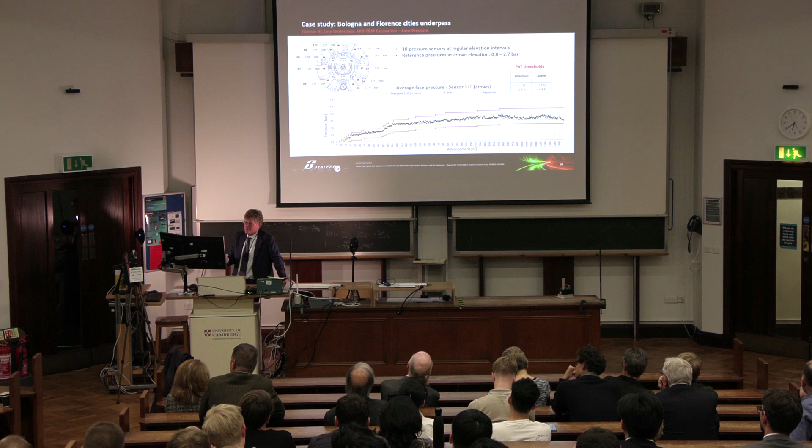I will show you in a while. So this was the reference value, with attention and alarm value, and this showed that the pressure at the crown, which is the most important one because it's the highest one, had to be maintained, otherwise you are not excavating in a TBM mode.

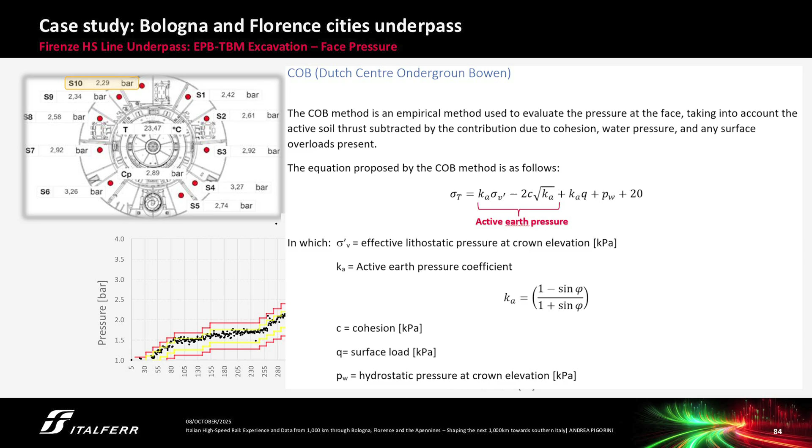And the pressure by design was calculated, basically it was the active earth pressure plus the groundwater pressure plus the surface load plus 20 kPa. That's also how the reference pressure on the crown was calculated. And you have to check also the total weight of the material in the excavation chamber.

So you have to be sure that the density in the chamber is equal in all the height of the TBM machine. So you have to check that the density, which was estimated at 14.5, basically calculated by the different pressure between the sensors, the higher sensor and the sensor in the invert.

This value should also be the same if you calculate it by doing the difference of pressure between the other pressure sensors in the face chamber. And actually, as you can see from the graph, this is mostly like this, but we also had some cases where the density was not at that level, so it was more like 1 or 10 kilonewtons per cubic meter.

So in that case, of course, it is not real TBM pressure, that is liquid and air, so it's not working properly. And you could have some problems if this is something that happens often.

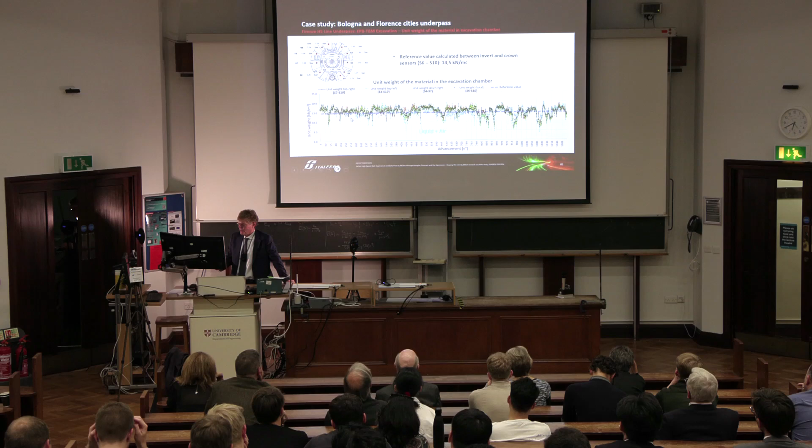Last thing I want to show is the thrust forces. You have to keep in mind that usually this TBM, it's quite common to have 38 thrust jacks. This is, let's say, a 10-meter machine.

19 shoes, so two thrust jacks every shoe, and 5 of these were instrumented. We thought that all the thrust jacks push with the same level of pressure, but it's not at all like this, as you can see here.

Basically, group A on the crown contributes about 10% of the total force. The section groups E and B, the lateral ones above the center level, contribute 35%, and the most part of the pressure, 55%, is in the lower thrust jacks, because you have to keep the TBM machine with the cutter head going up, since the weight of the machine tends to make it go down, so you have to push a little more with the thrust cylinders in the invert. This has to be taken into account when calculating the rebars for the precast lining, especially the circumferential bars, accounting for this pressure from the thrust jacks. But anyway, this went quite well, and the measurements were according to the trigger level.

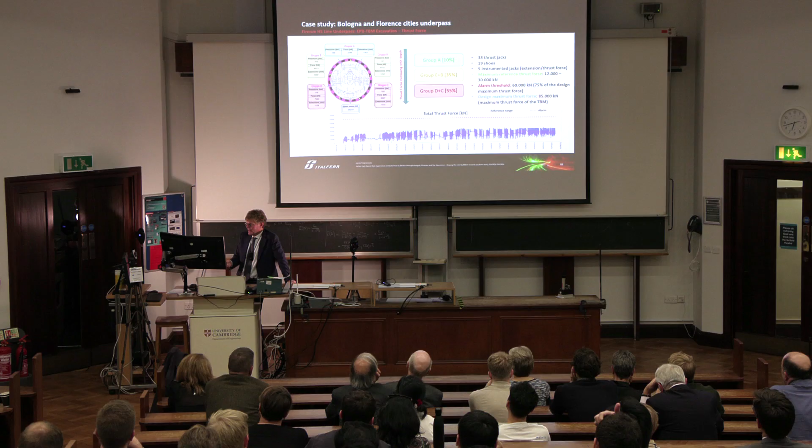Just to very quickly give you some data about the topographic section - it's a typical section, so I won't go into detail, but basically we get points on the tunnel axis, leveling points on the tunnel axis, and transversal sections on the road when it was possible.

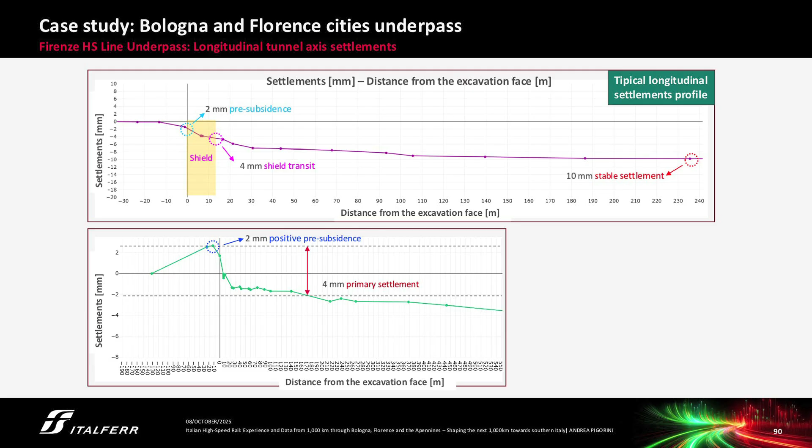The settlements we measured were very, very little in this case, like 5 millimeters. These are all longitudinal tunnel axis settlements. As you can see, less than 15 millimeters for TBM1 and even less for TBM2. This was the typical value, with a longitudinal section showing few millimeters ahead of the tunnel face, arriving then to 1 centimeter. Sometimes we experimented also a positive pre-subsidence, probably due to some foam going towards the surface, but this was very, very occasional.

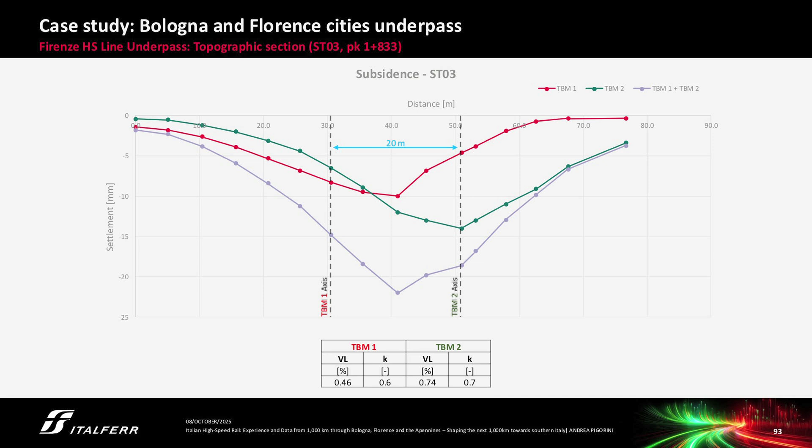This is the graph with the chainage and the settlement for the 2 TBMs. You can see the values I mentioned before, and there's no real difference between TBM1 and TBM2, and the volume loss is the same - sometimes it's higher for TBM1, sometimes higher for TBM2. I'll show you a transversal section with the settlement of TBM1 that is a little less than TBM2, but again less than 1.5 centimeters. The K value and the volume loss are quite in accordance with what we expected.

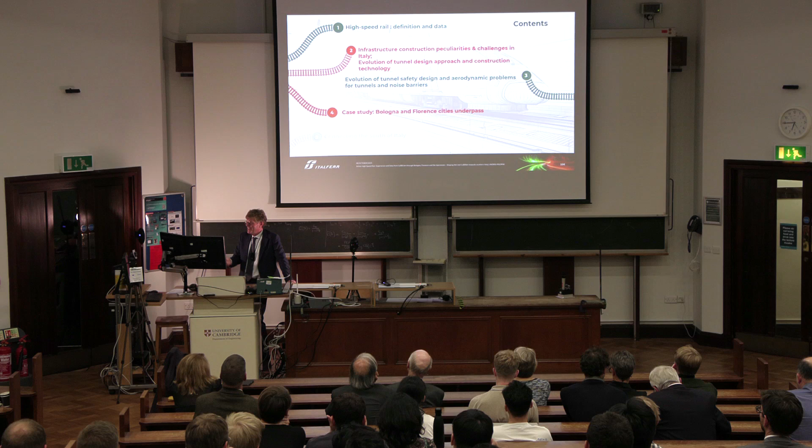Connecting the south of Italy - just to tell you that after this 1,000 kilometers, we are now working on the south with 400 kilometers between Salerno and Reggio Calabria, and the whole Sicilian stretch: Messina, Catania, Palermo. We are also working on connecting Italy to the north with the Brenner Base Tunnel. So we're working on the Italian south access to this base tunnel, both the Moncenisio tunnel with France and the Brenner Base Tunnel with Austria.

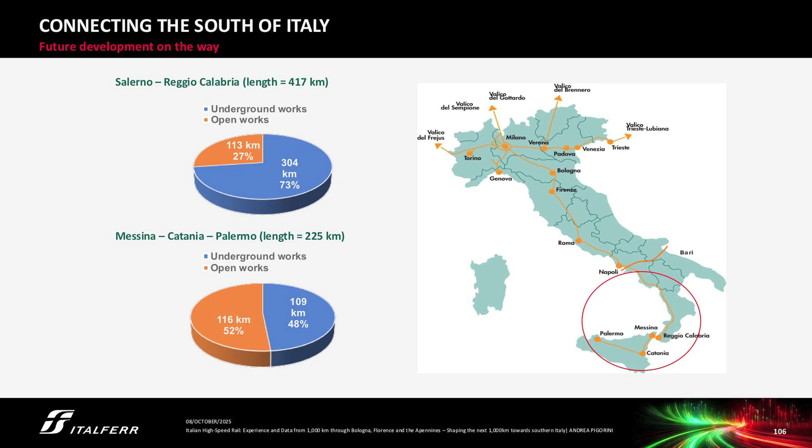Again, a lot of kilometers of tunnels are on this stretch, more than 73% for Salerno-Reggio Calabria, and 50% in Sicily. We have to recall that between Calabria and Sicily there is a bridge that we hope is going to be built.

Actually, the contract has been re-signed with the contractor, and this would be a single span suspension bridge, 3,300 meters - the longest one currently is actually a little bit less than 2,000 meters, in Turkey - featuring 2 towers, 400 meters tall.

You can imagine there's also a lot of tunneling, especially on the Sicily side, to connect the bridge to the city of Messina. This is basically my last picture before the conclusion.

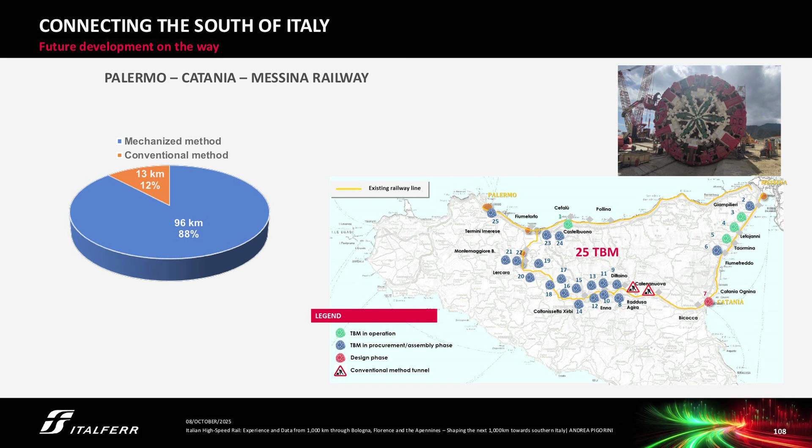These are the number of TBMs, the green ones are working. Actually it's not updated, we're not at 4, but we have 6 TBMs working today, and this will become 25. I have to mention that until now, in all the life of Sicily, only 3 TBMs have excavated. So this is an enormous investment for building a good railway line also in Sicily.

Some conclusions: the widely planned construction of high-speed railway lines across Europe contributed to reducing travel times and changing the travel habits of many people living in Europe. Over the past decades, advancements in tunnel design approach and construction technology have significantly enhanced the tunneling industry. This paved the way to an extensive use of long underground stretches for high-speed rail infrastructure. In Italy, the conventional excavation method has been widely used to build the high-speed railway network already in operation. This method allows for the complete industrialization of tunnel construction through full-face excavation while controlling the deformation of the tunnel face-advance core, with ground improvement applied where necessary.

On the other hand, TBM EPB excavation has been used to tunnel beneath the city of Bologna and Florence, that is still ongoing. In both conventional and TBM excavations, a large monitoring program has been adopted, controlling design values and TBM parameters. A large infrastructure investment program supported by European funds is currently underway to expand the high-speed network to the southern region of the country.

Due to the orographic context and to minimize soil consumption - I'm also the ITA president, so this is exactly true. Tunnel for a better world, that is our slogan.

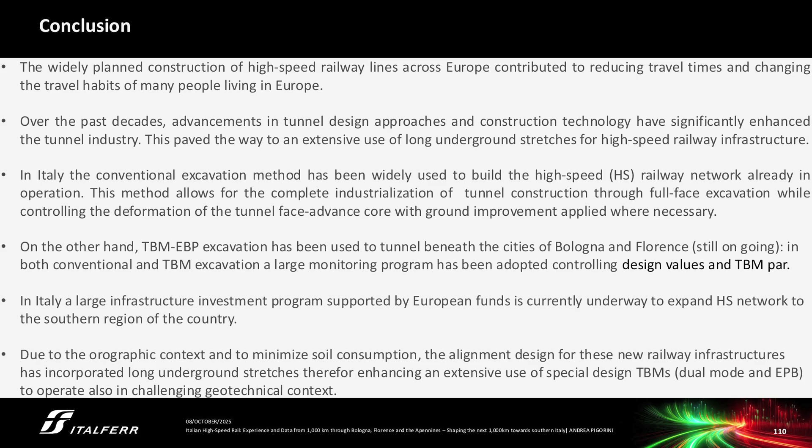For this new rail infrastructure has incorporated long underground stretches, therefore enhancing an extensive use of special design TBMs, that is usually dual mode and EPB TBMs, to operate also in challenging geotechnical contexts.